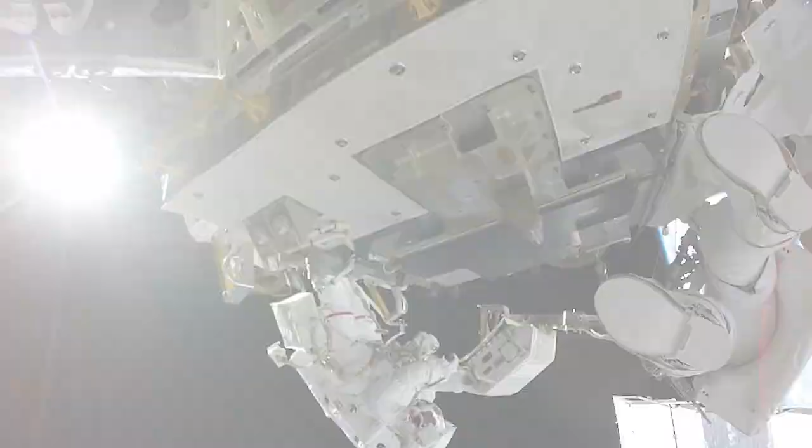We're going to the moon to explore, and we're going to the moon for scientific discovery. Our destiny is always to go and see what's further and what's next. The moon is a stepping stone, and the moon is a place we need to learn how to live so that we can continue to go beyond.

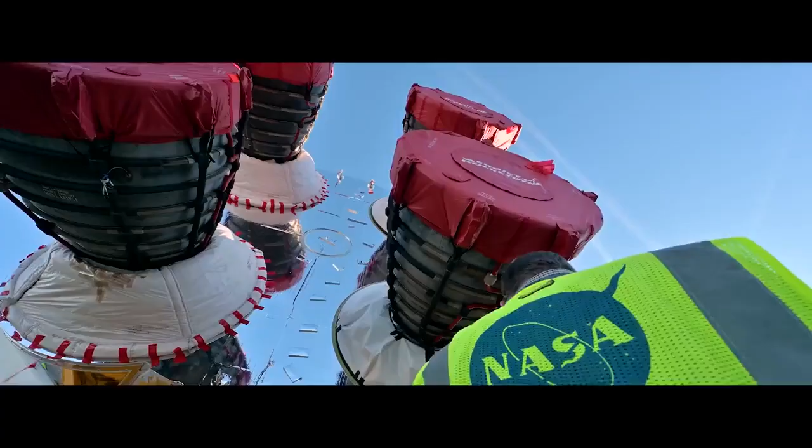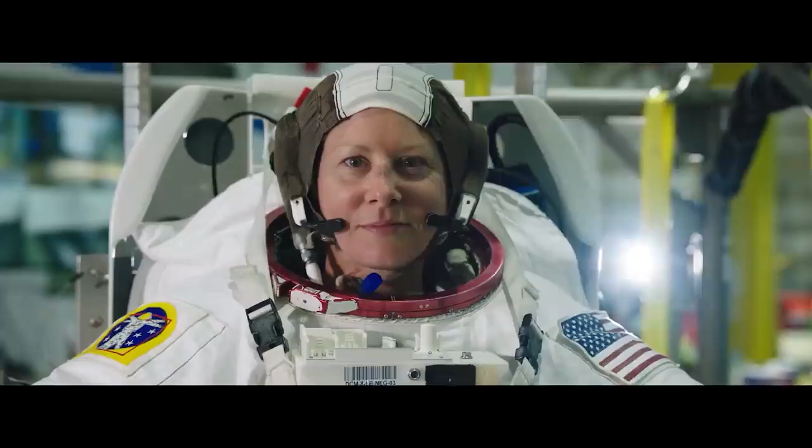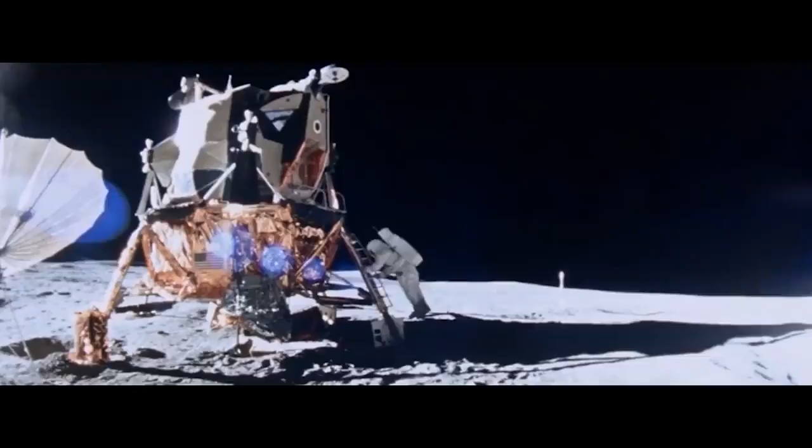We are focused on all that lies before us. Only together will we bring to life this global ambition of returning to the moon. And while our work is far from finished, we've never been closer to seeing a new generation step beyond our home planet. We are building on the achievements of those who came before. The giants who conquered gravity and raised a banner in the heavens, they beckon us to go farther, to the moon and on to Mars, to seek a deeper understanding of our universe and bring all that we learn home.

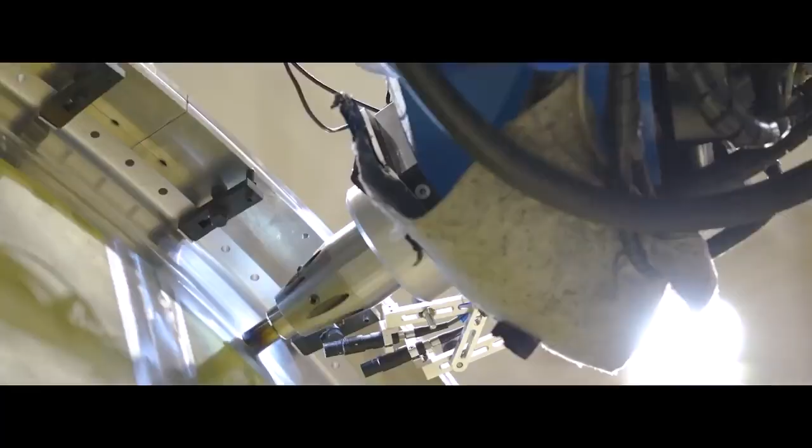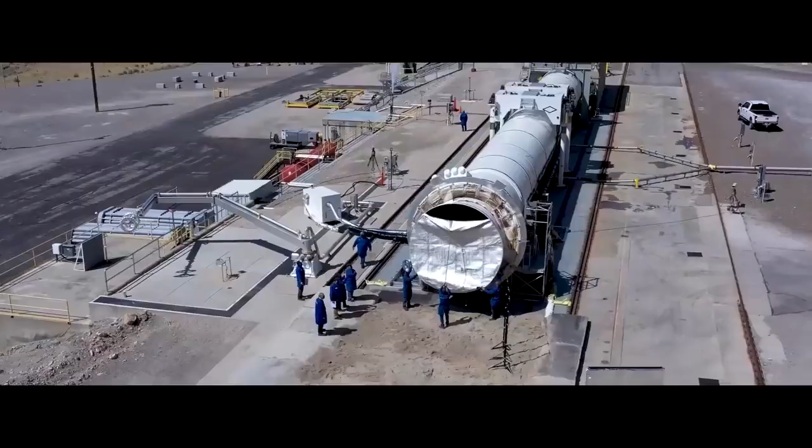2020 was a year of unpredictable hardships, and yet, step by step, we resolved to press forward toward this grand vision. The daily efforts of thousands of suppliers from all across this country and around the world fed into stunning milestones and laid the groundwork for history.

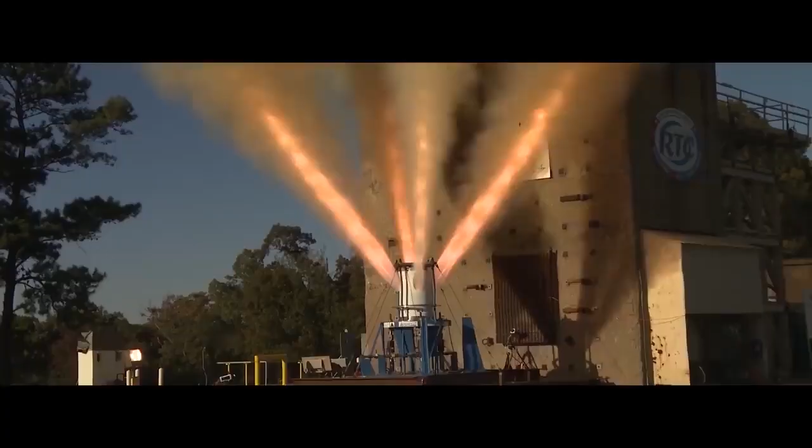Artemis has been woven into our culture. It has fostered collaboration across the aisles and across the ponds. It has grown beyond plans and preparations to include hardware and software. And now, it has a heartbeat.

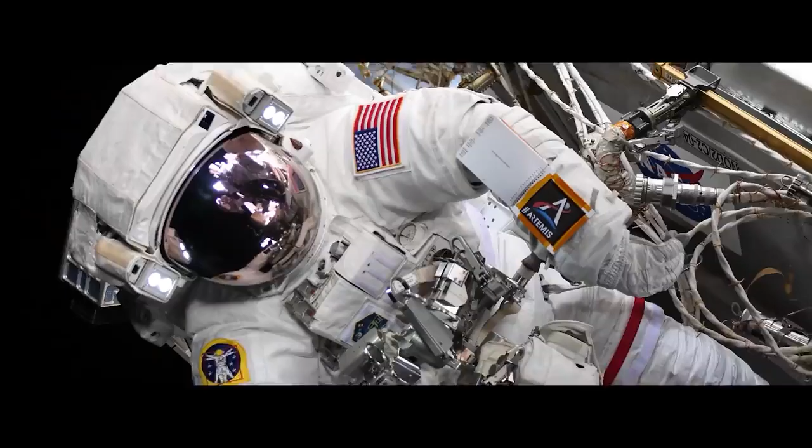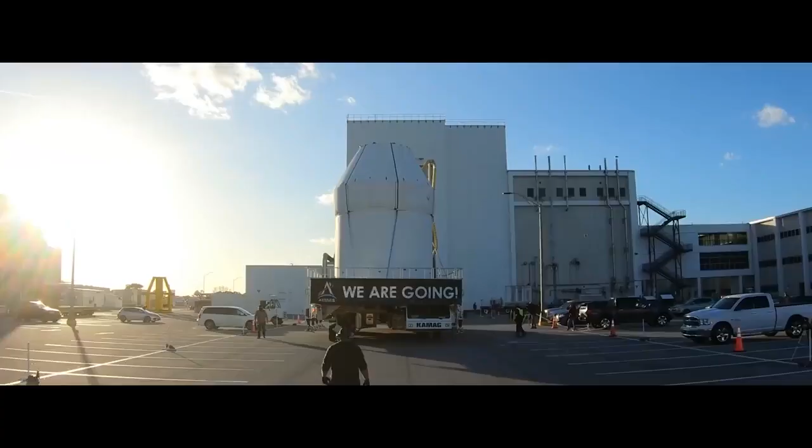You can feel the momentum. It is undeniable. We are going. And together, we will see Artemis light the way.

Our mission to the moon is no longer some far-fetched dream. This is reality. We are going. This is the next step in evolution.

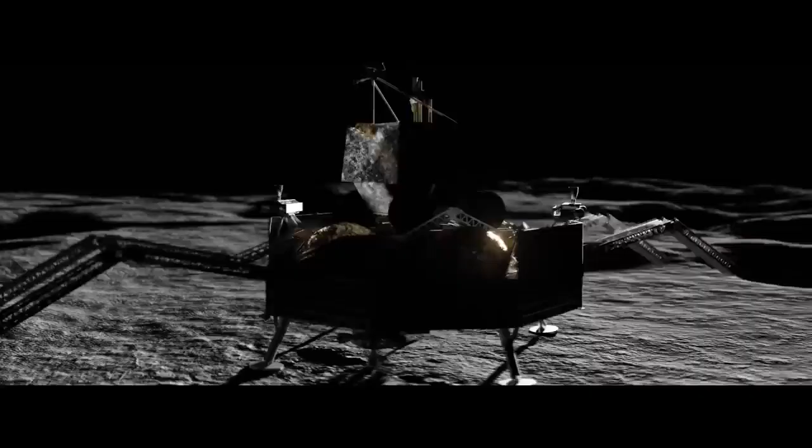They're not just PowerPoint slides. They're actually metals being bent, shaped, formed to build the things that we're going to use. This is real. This is going to happen. We're going.

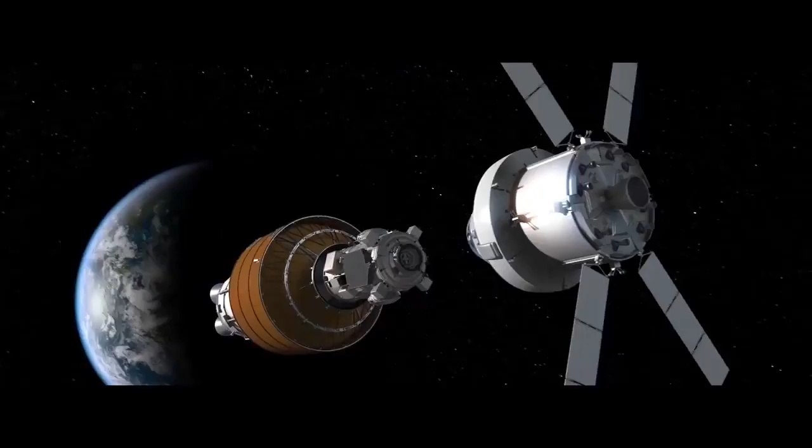We are going to the moon to learn how to live on other planets for the benefit of all. Let's go.

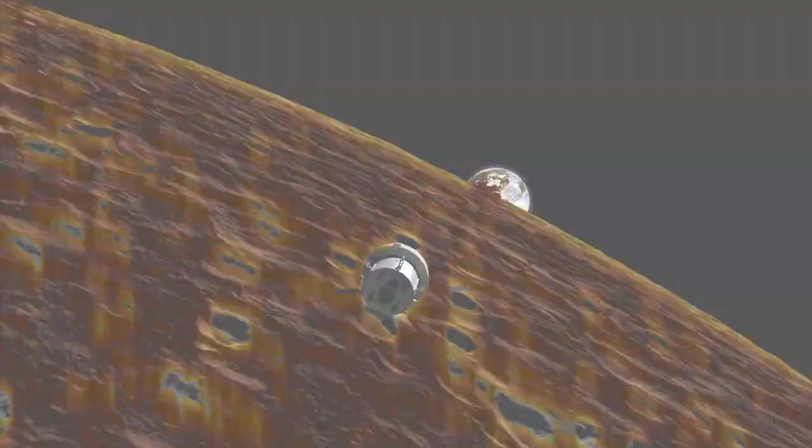I am Patrick Petty, one of the activity coordinators with MicroG NExT. This year, MicroG NExT is offering 3 Artemis-focused challenges for undergraduate students, with each of the challenges directly linking to lunar surface operations and allowing students to design mission-enabling hardware for the upcoming Artemis missions.

Challenge 1 calls for the design of a lunar sample site location calibration marker, while Challenge 2 requires the design of a lunar sample bag as well as a bag dispensing device. Both of these challenges were designed in partnership with the EVA Tools Office at NASA's Johnson Space Center. For Challenge 3, students designed a lunar reusable surface anchoring device. This challenge is carried out in collaboration with the Small Robotics team from Jet Propulsion Laboratory in California.

I'm now going to turn it over to Ronald Beck. Thank you, Pat. I'm Ronald Beck, one of the activity coordinators with MicroG NExT. For its 2022 iteration, MicroG NExT received proposals from 40 teams consisting of approximately 300 total undergraduate students from institutions across the United States. Thank you to all of the teams that proposed innovative design solutions, and a special congratulations to the teams that are advancing to Phase 2 of the MicroG NExT Challenge.

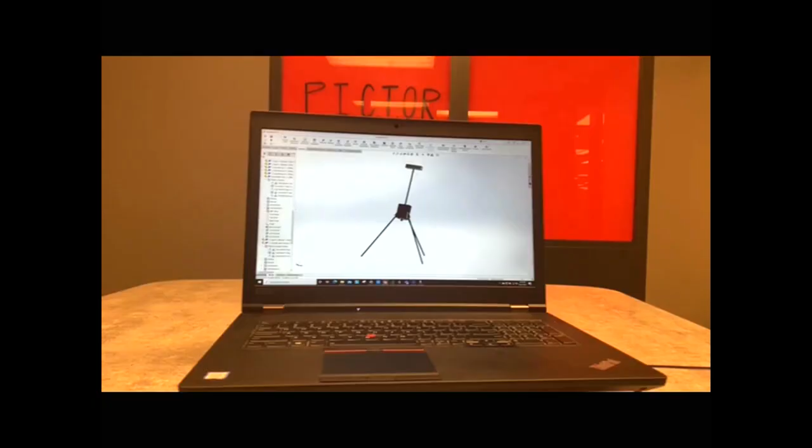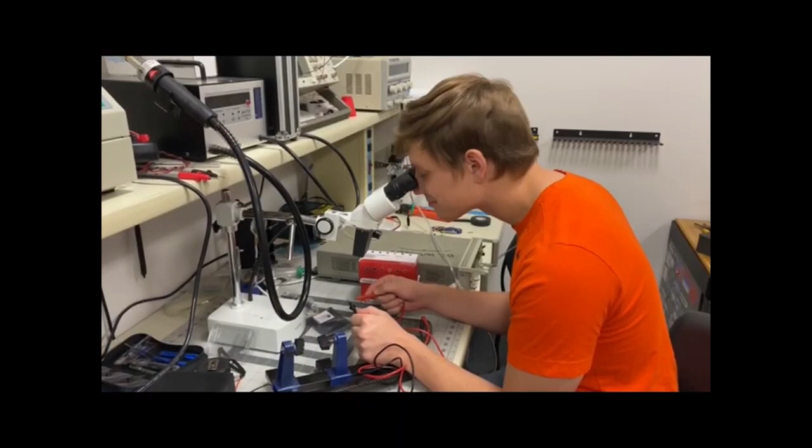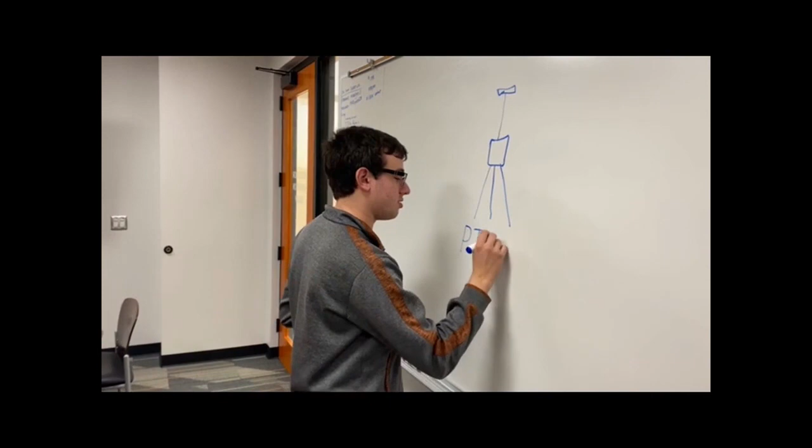Go Pokes! Are your gnomons getting you down? Are you tired of half-baked sample marker solutions that just aren't working? Introducing Pictor. Pictor is brought to you by some of the greatest engineering minds at Oklahoma State University, with majors in mechanical, electrical, aerospace, and computer engineering. Pictor is a sample marker that meets the first 2022 MicroG Challenge. We used lightweight, flight-like durable materials so that Pictor clocks in at just under a pound. We've optimized the design of Pictor to minimize sharp edges and pinch points, meaning you'll never get a scratch while operating Pictor. Pictor is designed for easy deployment and recovery, with a stowed configuration of 15 by 2 by 4 inches that expands to 20 by 7 by 12. And with a 2x2 alphanumeric label, you'll never lose this sample marker on the moon. Pictor simplifies the sampling process, allowing for more data to be collected and more effort to be put towards other areas of the mission.

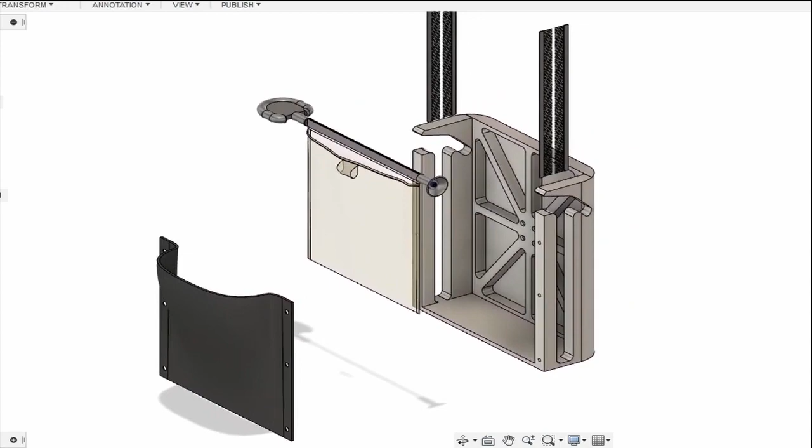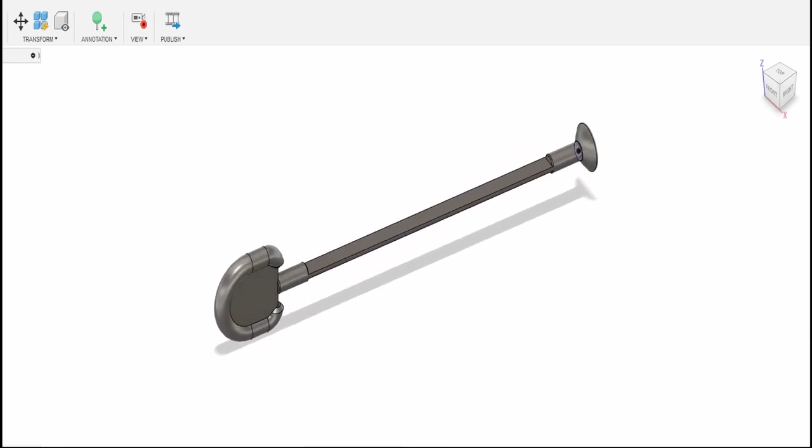This is Thanos, our tool for handling aggregate and novel specimens. This design uses nested polypropylene bags, each with an attached sealing bar that folds embedded ductile wires within the bag seams to create a labyrinth seal. The design was based on minimizing the system's usage fatigue while maximizing smooth fluidity and reliability when in motion. Sample acquisition is a current linchpin of space exploration and will continue to be so in the future. Our team's design intent is to provide a versatile, simplistic instrument that works as a dependable aid to astronauts. Our aim is to produce a final product that can be implemented on manned missions to any extraterrestrial topography.

Great work by all of the Lunar Sample Bag and Dispensing Device teams selected to advance to Phase 2. I will now introduce Andy Klesch from NASA's Jet Propulsion Laboratory, who's with the JPL Robotics team. He will give us more details about the Lunar Reusable Surface Anchoring Device.

This year, students are going to be taking on a brand new challenge through the MicroG NExT program at NASA's Jet Propulsion Laboratory. As we prepare for Artemis and a return to the moon, students will be building an anchoring device, allowing an astronaut to deploy it with one or two hands, unpowered, and to grasp and provide a force of greater than 10 pounds. This anchoring device will be used for robots to collect samples, for astronauts to pick up rocks, or to provide a tethering point for larger assemblies and vehicles. We look forward to seeing what the students will come up with, as they have proposed ideas from across the nation, and next spring we'll be testing them out at NASA Johnson's Neutral Buoyancy Lab.

Hi, my name is Justin Koch, and I'm a robotics engineer here at NASA's Jet Propulsion Laboratory. Congratulations to the Ank Roarers team from Columbia University. These Lions, made up of the class of 2022, 23, 24, and 25, are roaring into Phase 2 for the 7th year and will design a lunar reusable surface anchoring device to be tested at NASA's Neutral Buoyancy Lab.

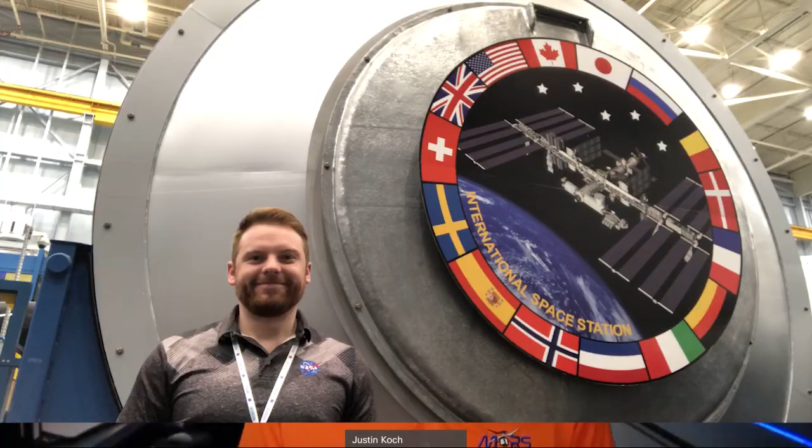Hi, my name is Tyler Duncan, and I'm currently at the Space Vehicle Mockup Facility here at NASA's Johnson Space Center. Congratulations to the Cyrox team from Iowa State University. These Cyclones of Iowa State are moving on to Phase 2 to have their concept design of a lunar reusable surface anchoring device tested in Houston at NASA's Neutral Buoyancy Lab.

Hi, my name is Kim Wright, and I'm a flight controller for the International Space Station here at NASA's Johnson Space Center. Congratulations to the Helios team from the University of Texas, Dallas, participating in MicroG NExT for the first time since 2016. They are moving on to Phase 2 and will design a lunar reusable surface anchoring device.

Hi, my name is Justin Koch, and I'm a robotics engineer here at NASA's Jet Propulsion Laboratory. Congratulations to Team Astra from Virginia Polytechnic Institute and State University. This is the 5th year that a team from Virginia Tech is moving on to Phase 2 of the MicroG NExT Challenge, and this year they will design a lunar reusable surface anchoring device. Awesome job, can't wait to see your device in the water at NASA's Neutral Buoyancy Lab.

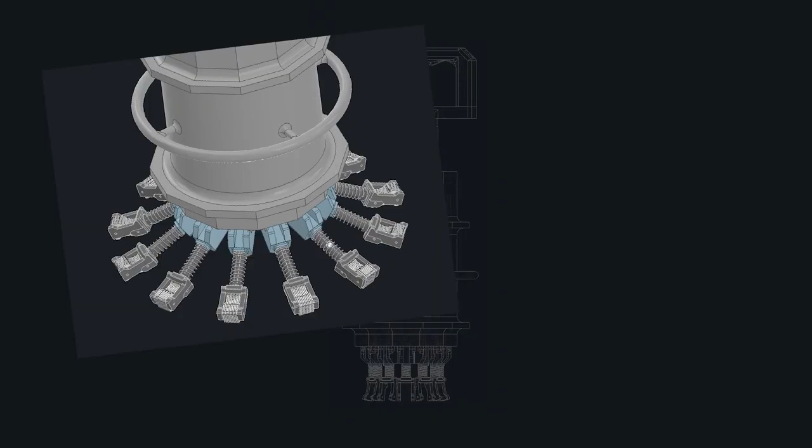We're Team Astra from Virginia Tech. We're developing SWAT, or spacewalk anchoring tech, to physically support astronauts on the lunar surface. Our anchoring device will be contained within a 6-inch diameter and 18-inch height tube. Inside the anchoring device is a 12-leg system. Each leg will encase 10 plastic frames, each with 3 microspines. The SWAT anchoring device uses these microspines to grip onto a variety of surfaces without penetrating the surface.

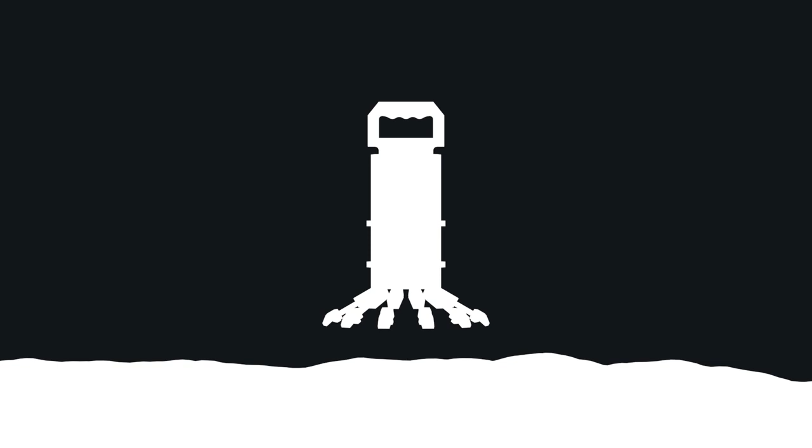To use the device, astronauts push down on the handle to extend the 12-leg system out of the container. The astronaut is then able to place the microspines on the surface and tighten the grip by pulling the handle back up. The microspines will have at least 10 pounds of holding force. To release the microspines, the astronaut will push the handle back down through a ratchet and pawl mechanism. To restore the mechanism, the astronaut simply pulls the handle back to the uppermost position. Astronauts will benefit from the SWAT on future lunar missions from its intuitive and robust design, which in turn contributes to a prospective future in space exploration.

Hi, my name's Mary Walker. I'm a project manager in the EVA Tools group here at NASA's Johnson Space Center. Congratulations to the Space Wranglers from the University of Wyoming. In their first year of participation, the Space Wranglers become the first team from the state of Wyoming to advance to Phase 2 of the MicroG NExT Challenge. The team will be designing a lunar reusable surface anchoring device.

Great job, team. Hi, my name is Kim Wright, and I'm a flight controller for the International Space Station here at NASA's Johnson Space Center. Congratulations to the Rose Rocks from the University of Tulsa. This is the first time a team from the University of Tulsa is moving on to Phase 2 of MicroG NExT Challenge, to have their concept design Brad, the basic rock anchoring device, tested at NASA's Neutral Buoyancy Lab.

Hi, my name is Andy Klesch, and I'm the lead engineer in the Lunar Trailblazer mission here at NASA's Jet Propulsion Laboratory. I'd like to congratulate Boise State University and their microgravity undergraduate design team. The Broncos are moving on to the next phase of the MicroG NExT Challenge for the 7th year in a row.

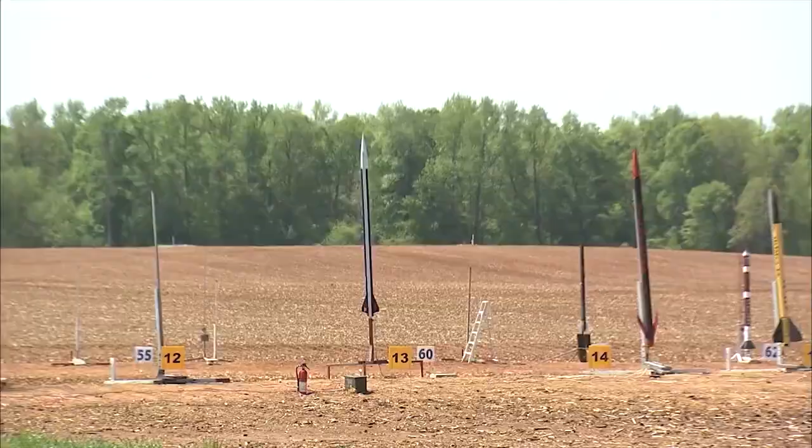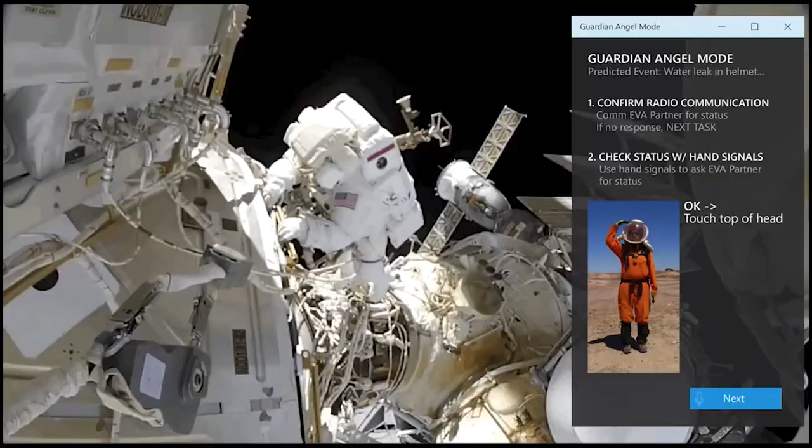If you're a student, you can design and build technologies that support the Artemis mission with NASA's Artemis Student Challenges. No matter your background or experience, you're invited to choose a challenge that interests you, whether it's rockets, robots, tools, software, vehicles, or other technologies. There's an exciting challenge for you.